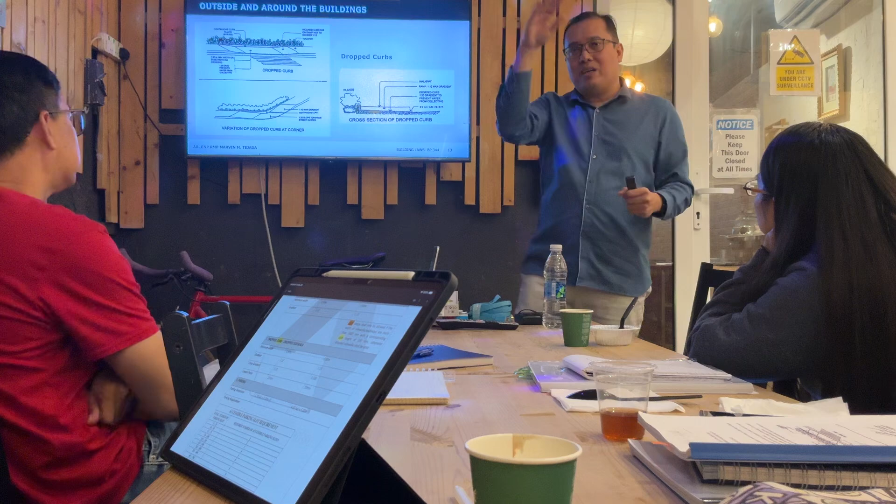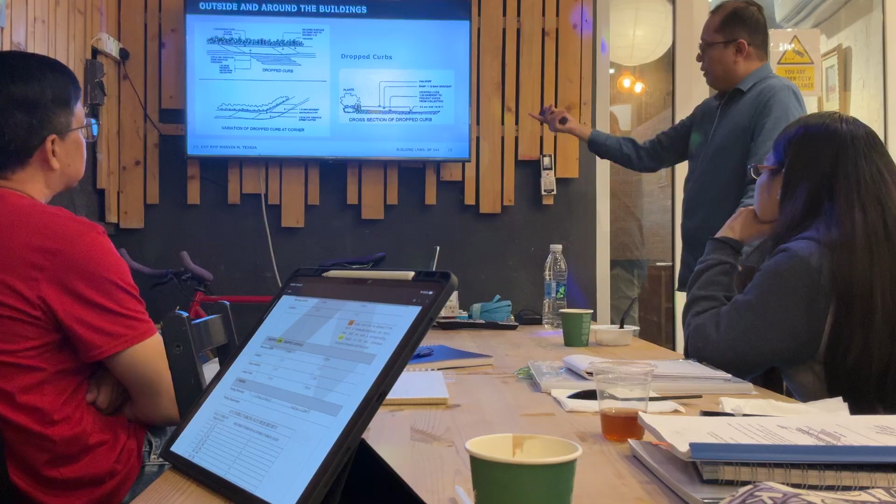So this is the cross-section of the drop curb. So ito yung sinasabi niya kanina, na kung meron mang elevational changes, pinaka-maximum dapat 25.

Okay? Alright. So ito yung mga curb cutouts. Ito yung mga recommended on how it's going to be designed on the street. Okay? So ang purpose natin, the curb cutouts should not be obstructing the walkway or passageway for the wheelchair. So not more than 1:12. Ibig sabihin, pag nag 1:10 yan, 1:8, violation. Okay? Di bali maging 1:15, 1:20, okay? Ibig sabihin, mas smooth. So these are all the variations of the drop curbs at corners na po pwede natin

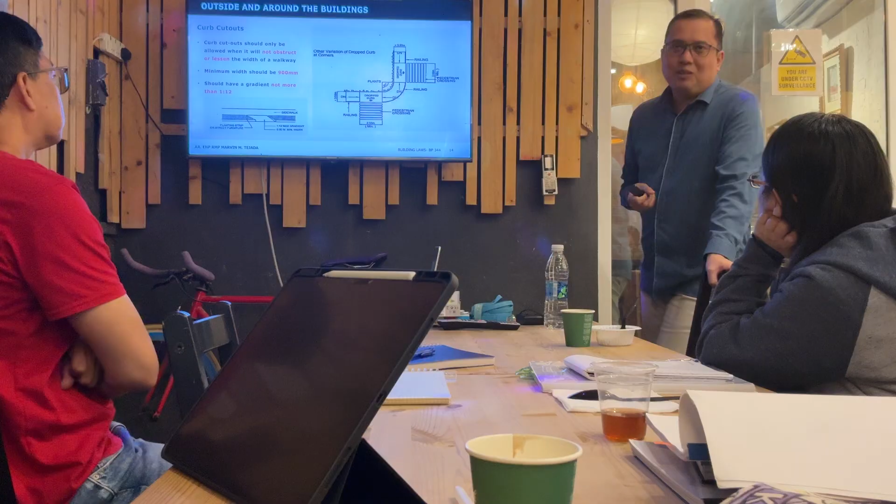Our sidewalks need to be as level as possible. And those materials na ginagamit natin, yung mga nagdo-drawing ng infrastructure dito, they know it. Yung mga unit paving, kailangan yan, kahit na nabasa, ang slip resistance, dapat mga R10 o R11. O saan ko sinasabi yan? Kasi those are the ratings by DIN.

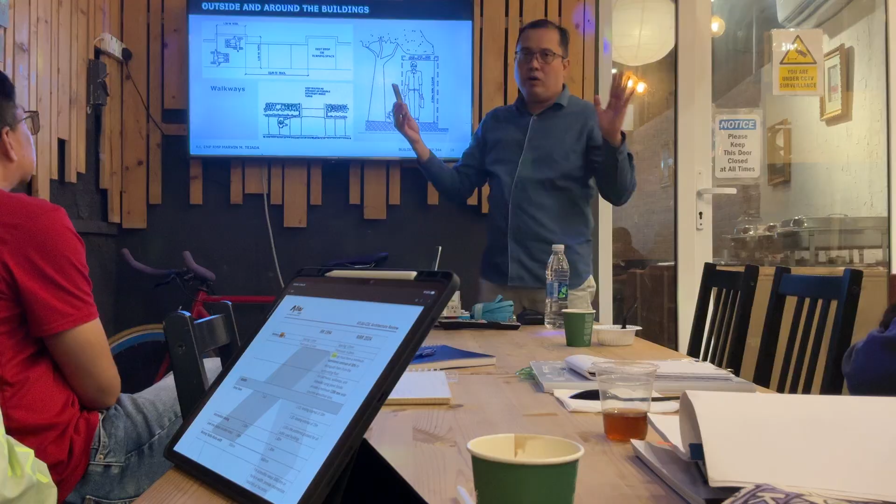So visually you can see it here. That's what I'm saying kanina. Okay? So self-explanatory. So meaning, if I am in a walk space, I have to have a rest stop. And the dimension should be almost like 1.5 by 1.5. So those rest stops in between 12 meters maximum.

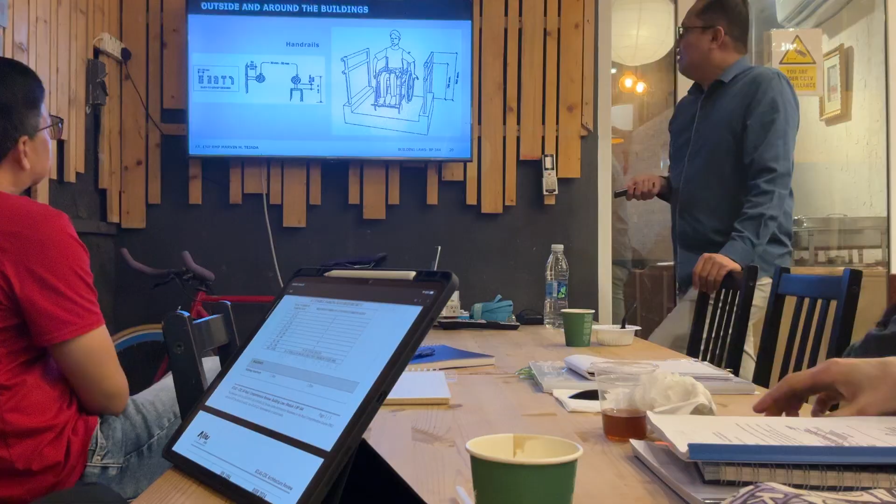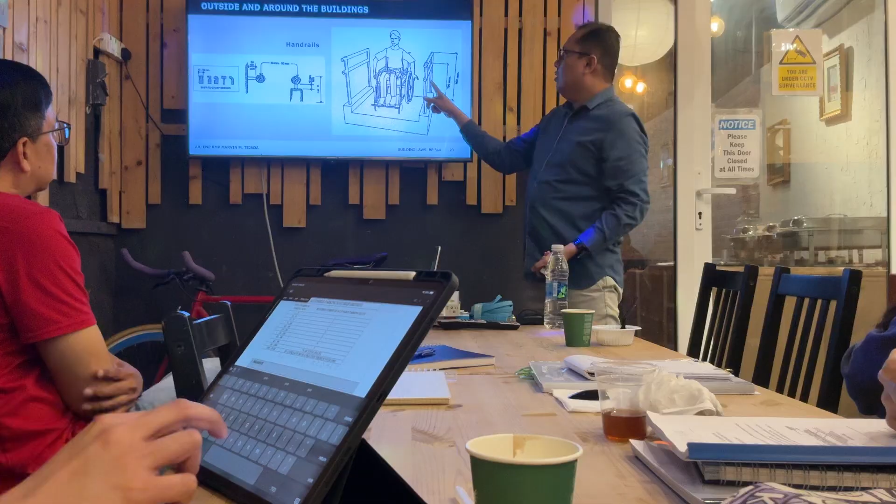So handrail. Okay, so parang mas mabilis kapag visual na tayo. Sige, go. Ayan. So meron kang top rail. From the top rail to the paving surface, or walk surface, 900, 0.9 of a meter. Then kailangan merong intermediate rail. And that intermediate rail needs to be 0.7. So kapag si Architect Armando Eustachio ang mag-inspect ng building nyo, sukatin nyo yan. Then sa kanya kayo papailan ng kaso, violation.

Okay. Alright. So kung ganito naman, naka-concrete tayo, ito naman yung mga required na minimum, maximum. Bakit? Kasi pagka kinuha mo yung handrail, even sa staircase, ito rin yung mga minimum distances. 40 mm, and then the diameter of the actual handrail is from 30 mm to 50. Pag tumaas pa ang diametro niya, hindi mo na yan halos ma-grasp, di ba?

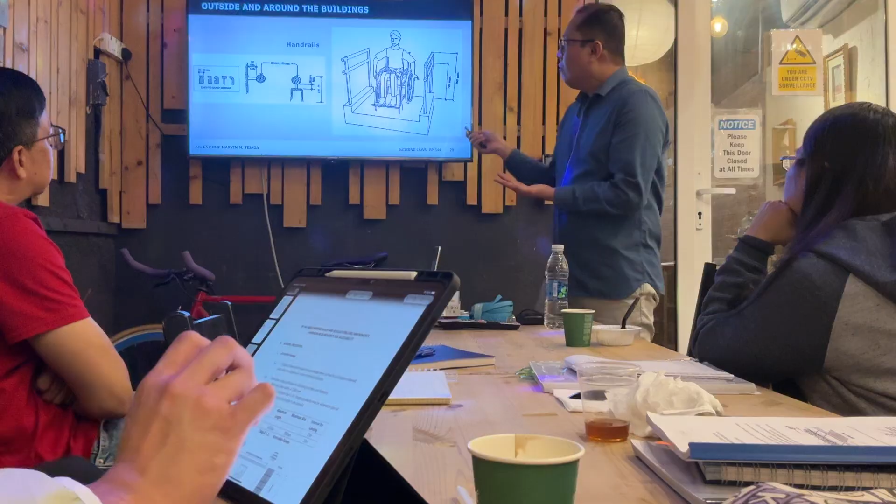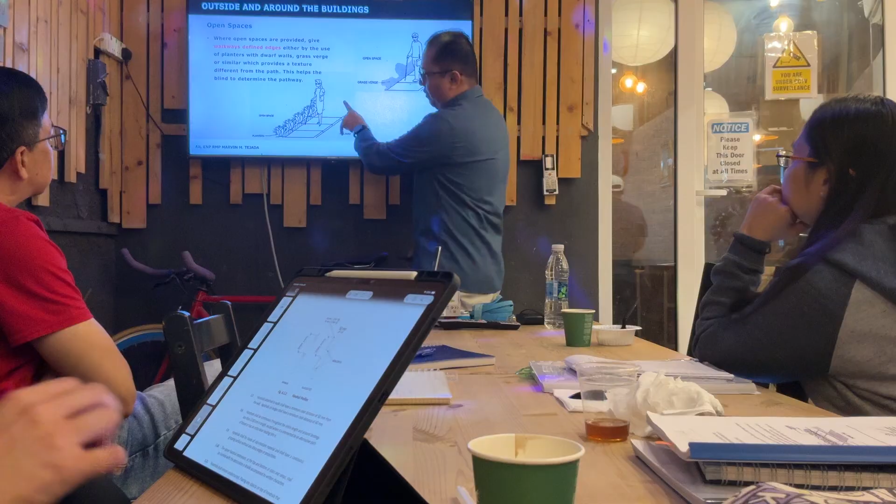So, in open spaces, yun ang sinasabi natin kanina, wala dapat mga overgrowth. Lalo na kapag visually impaired, of course, there must be some kind of rough surfacing para nalalaman nila na there is actually a boundary doon sa walking surface nila. Okay? So it needs to be defined by edges or any material that they can actually feel that there is a boundary to the walking surface.

Meron din standards when it comes sa paglalagay ng signage. So, we need to make sure na kung ako nakaupo sa wheelchair, pagka inangat ko ng konti yung head ko, hindi naman talaga ako dapat nakatingin ng napakataas. The allowable is 30 degrees, na dapat nakikita ko na yung sign kung nakaupo ako sa wheelchair. So, just imagine, kung susukatin ko na nakaupo ako sa wheelchair tapos 30 degrees, I would know kung ilan lang dapat yung taas ng mga signages.

It should be kept simple and easy to understand. When I was working with Doha International Airport, there was submission of those signs para sa mga disabled person. Even yung sign ng toilet, babae, lalaki, even prayer room, chine-check yun. Hindi po pwede masyadong creative doon. Kasi kailangan singular, monolithic ang makikita nilang mga sign para mas lalong makita siya. Kapag masyado kasing maraming design, magulo siyang tingnan.

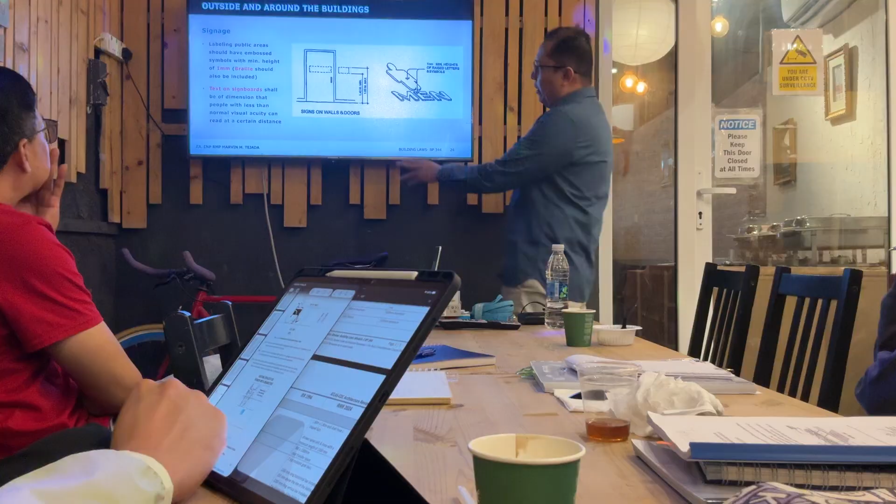Right. Now, in public areas, paano siya ilalagay? So, very clear naman tayo, di ba? Ang minimum niya is from the bottom side of the signage, 1.4. Of course, you have to have the maximum height, 1.6. Okay, so yun yung ano natin.

Then, yung thicknesses, actually natanong ito sa exam. Even yung thickness ng escalator buttons, elevator buttons, natanong din yun. So here, kung gagawa tayo ng mga cutouts for the signages ng mga PWD, 1 mm minimum height. So minimum yun, ibig sabihin pwedeng maging 2 mm, maging 3 mm.

Okay? For the symbols. Now we are going to design the crossings outside and around buildings. So ganito dapat siya. So we have a zebra crossing. Ito nga yung sinasabi ko sa inyo. Napakahirap nito na tawirin ng isang naka-wheelchair. So kailangan lahat ng provisions, ibig sabihin ito, naka-depress talaga siya. As much as possible, level, para maayos yung pagpapatakbo ng wheelchair.

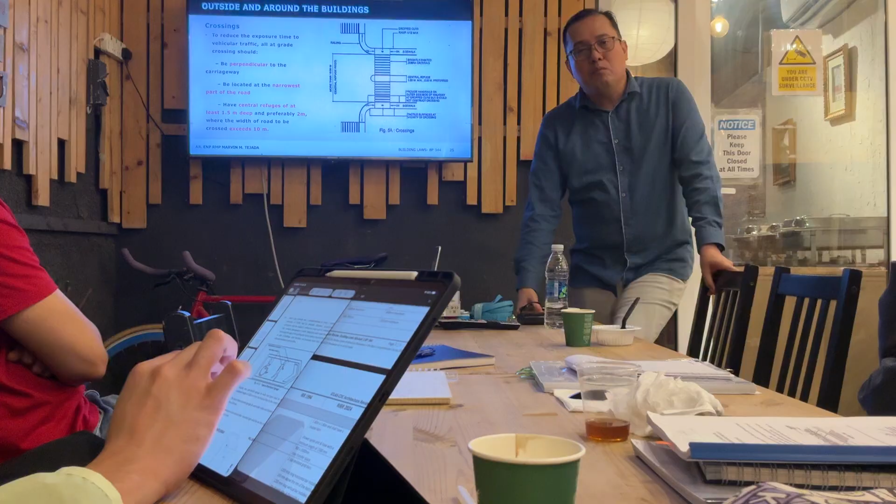So, meron tayong tinatawag na central refuge. Minimum nito should be from here to here, 1.5 deep, or preferably 2 meters, lalo na kung ang width ng road exceeds 10 meters. Okay, ito. Yung hierarchy ng mga road, mga minimum, maximum ng road, collector road, main road, major road, nakadepende rin ang BP 344 doon. So, konektado yun doon.

Hindi tayo mahilig gumamit ng tactile. Pero dito sa bansang ito, sa Qatar, even sa loob ng airport, you can actually see metal tactile. Bakit kailangan ng tactile? It is actually required for those visually impaired, lalo na pag may hawak na na cane.

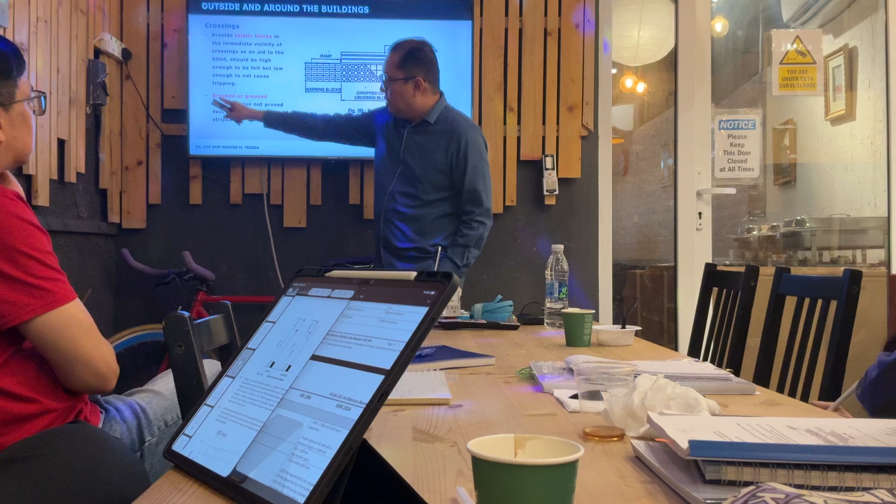So, tactile blocks, okay? And the concrete needs to be having this finishes, brush or groove, okay? Para mas applicable para sa mga PWD. Of course, visually you can see here crossing. You can actually use all of this.

Okay. But alam niyo ba, mayroong science behind why yung traffic light is having those kind of lights na luminescent red, luminescent green. Because may mga tao kasi na colorblind. Do you believe that? Okay. Na minsan akala natin sa normal na tao, green yung atin, pero sa kanila gray.

May mga ganon. Actually, I attended one webinar. Even yung webinar namin, talagang naka-design siya para sa mga color-blind people. Okay? So, ayun. Even the letters, font style, do you know the meaning of font? F-O-N-T? Meaning yung lettering na style. Meron din certain na ginagamit na mga font style.

Okay? So, you can actually see them in public space. Hindi lang sila palamuti doon, but actually is essential. Okay? So, kung gusto natin maging livable ang city natin, if we want to become a place that is adaptable to any people, kailangan natin ito. Okay? Alright. So, alin ba ang kailangan natin maintindihan?

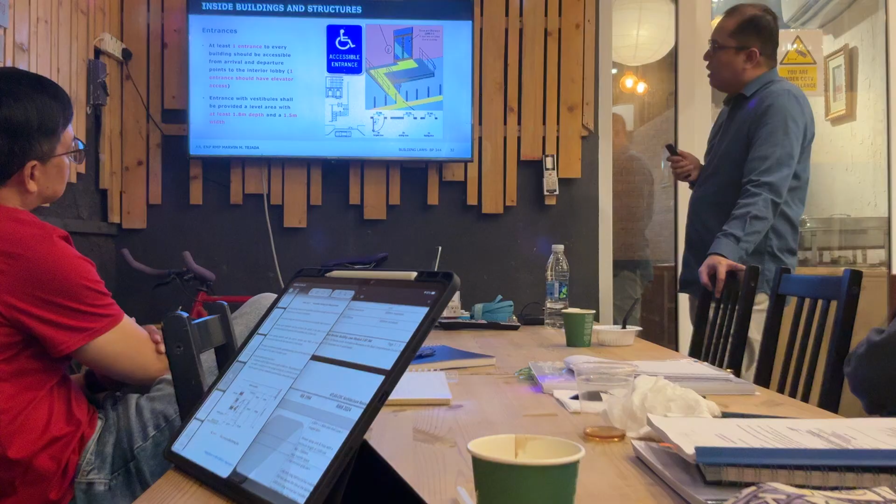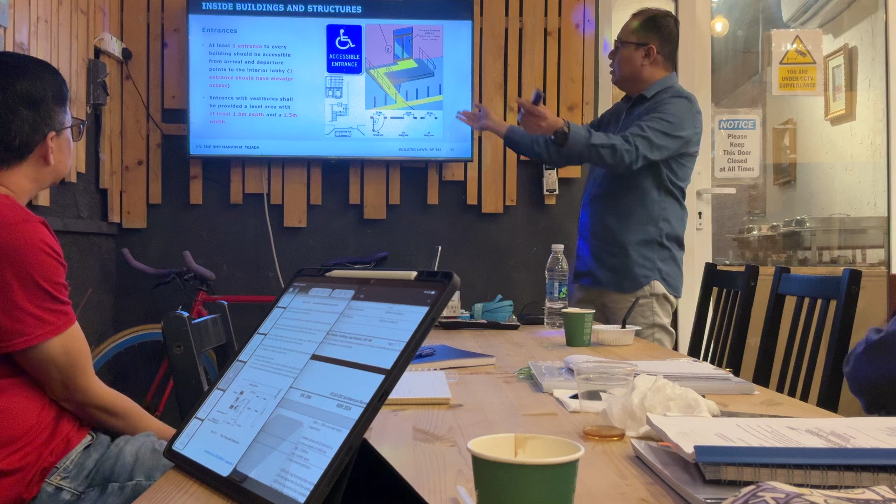Alright, so that's parking. Now we go to inside buildings and structures. Okay, so mas madami tayong pag-uusapan inside buildings and structures. So always there is a prominent sign. Okay, and then we have doors and doorways. Lalo na swing in or swing out. Should be swing in.

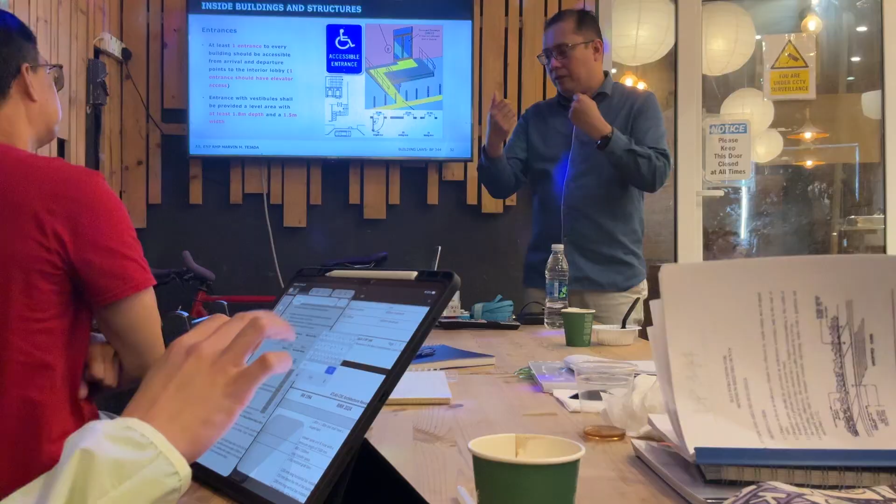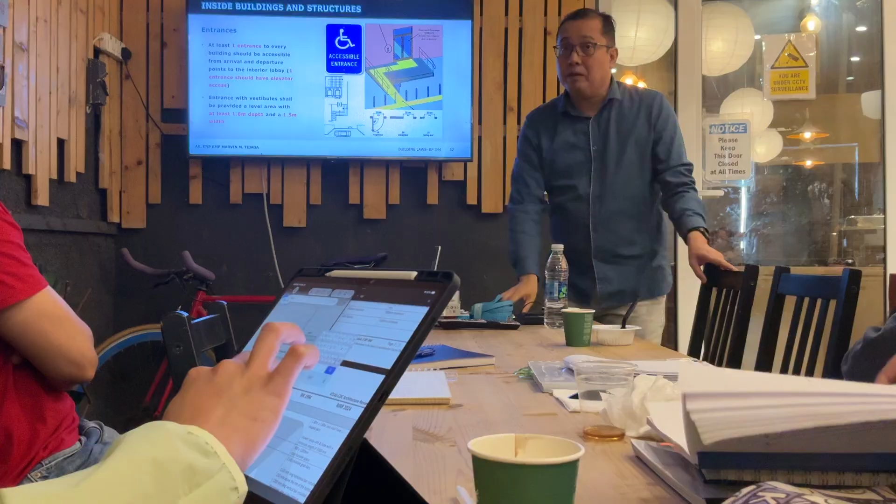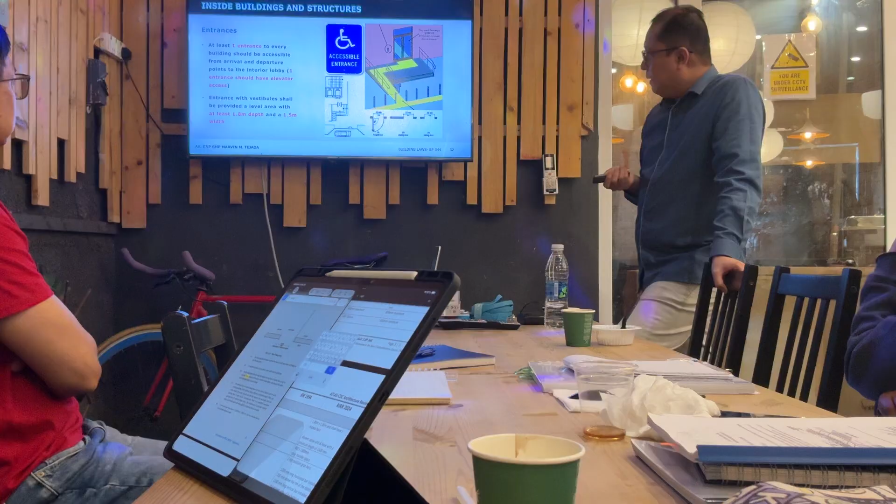Ganun yun dapat. Okay. So, at least one entrance to every building should be accessible. And then should have elevator access. Then, entrance with vestibule, ito yun. Okay. Should be having an area of 1.8 by 1.5 width. Okay. So, ayan ha. Alright.

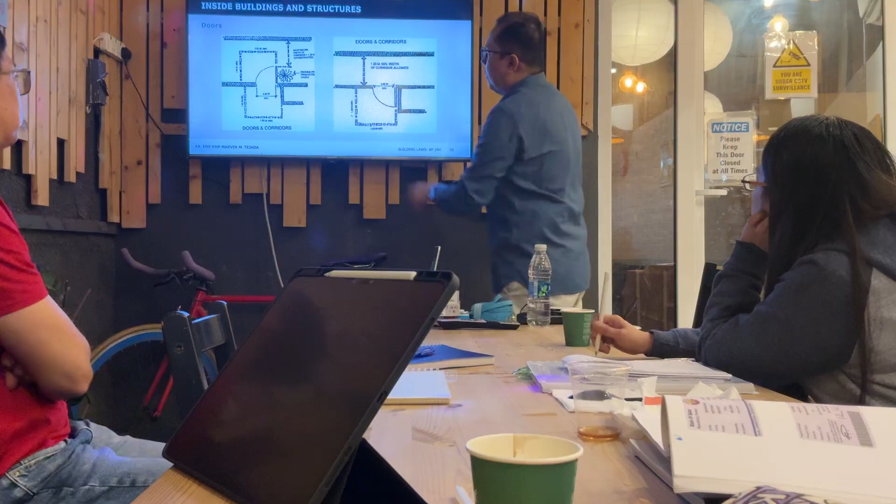So outswinging doors should be provided at storage room. Hindi po pwedeng paloob, lalo na sa closets and PWD toilet stall. Latching or non-latching hardware. Hoping na itong mga ganito, mga terminologies, ma-explain sa inyo kapag building construction na at pag-aaral na kayo na door hardware.

Doorknobs, ang location ng mga ganito para sa PWD, dapat between 0.82 to 1.06, mga full handles 1.06. And then may mga kick plate na 300 to 400. This is the kick plate. Okay, and then mounting ng mga hardware, either by latching or pull, and then threshold.

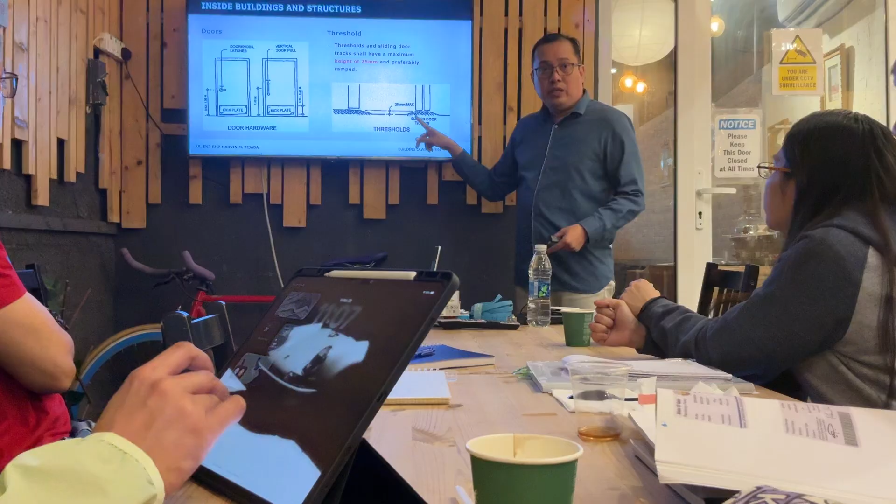25 millimeter max. Pwedeng bumaba, pwedeng 20 mm, pwedeng 13, huwag lalagpas sa 25. So ayun, tapos kung mapapansin ninyo, hindi po pwedeng ganito kaagad, square. Dapat may ano muna, tawag dito may chamfer. Tama ba? Chamfer.

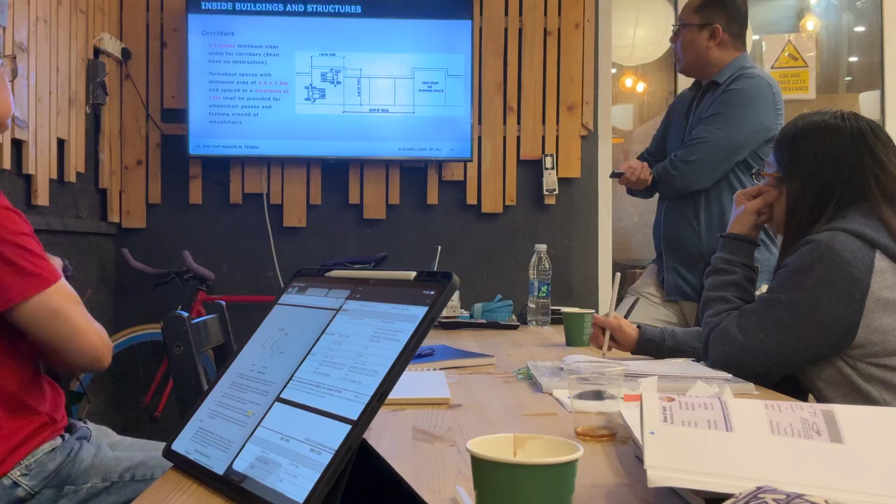Corridor, laging may rest stop, up to 12 meter max, then rest stop is measured 1.5 by 1.5. Kung may dead end, provide kayo ng turnabout spaces within 3.5 of every dead end. For example, here, 3.5 dead end. So still you need to have this 1.5 by 1.5 rest stop para sa inyong mga wheelchair users.

Importante na kapag ang mga passageway na dinidesign ninyo, always anti-slip or slip resistant. So interior, ang advice ko sa inyo, through DIN standard, laging R9. Then external is R10, R11. Pag tumingin kayo ng katalogo ng mga tiles, anything, stone surfaces, basta lahat, lagi nyo mahanapin yung slip resistance rating. So washroom and toilets, ito yung lumang batas, 1.7 by 1.8.

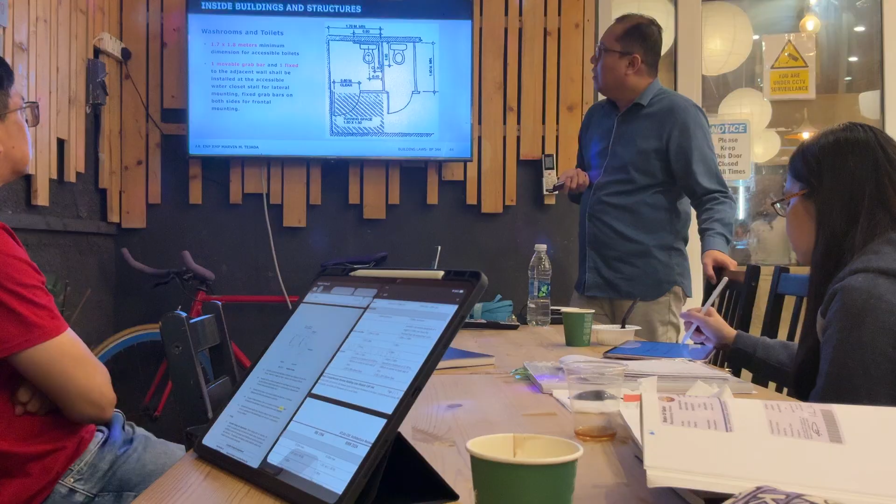Ngayon nagbago na yan. And then you have this, kailangan may grab bar. Meron tayong grab bar na dito, operable, hindi siya fixed. So importante na ilagay niyo sarili niyo sa ano.

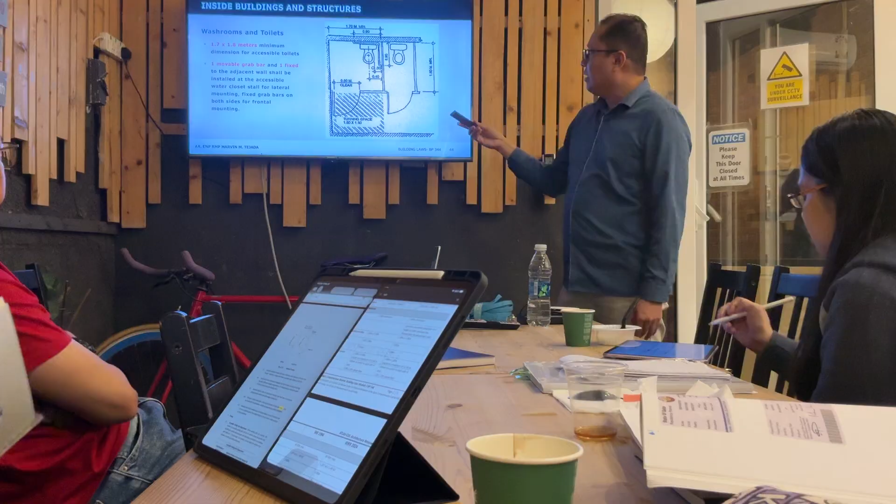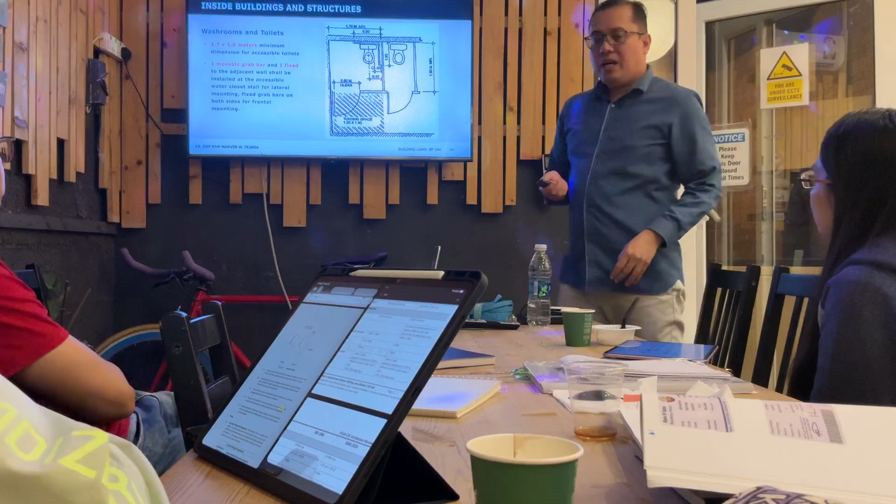Bye-bye. So ito yung layout natin, di ba? Minsan yung grab bar dito, meron pa dito, ang tawag dito yung operable. Nakakita ako ng disabled toilet, even yung pag maliligo sila, meron tayong tinatawag na parang may upuan din sila doon sa shower area. So napaka-importante naman ngayon.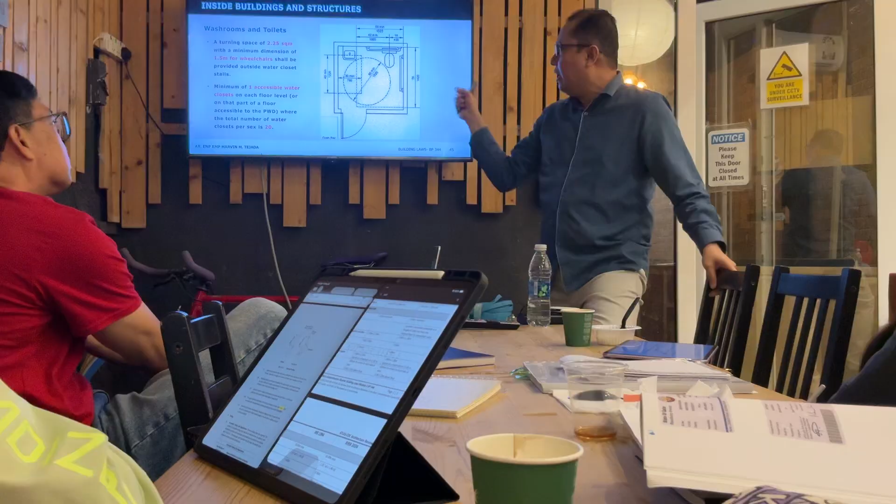So pagka may mga nagpe-pre-qualify sa akin na buong system ng disabled toilet, isang package yan, dapat bigyan niya ako ng hindi patingi-tingi ang ginagawa ko, isang supplier ang magpo-provide sa kanila. So ito na ang sinasabi ko sa inyo, ito ang pinaka-ideal. Walang tatamaan na any fixture. Madalas, itong linya na to, minsan tumatama doon. Minsan inaalaw ng batas yan sa luma, pero this time hindi, so dapat wala siyang tatamaan.

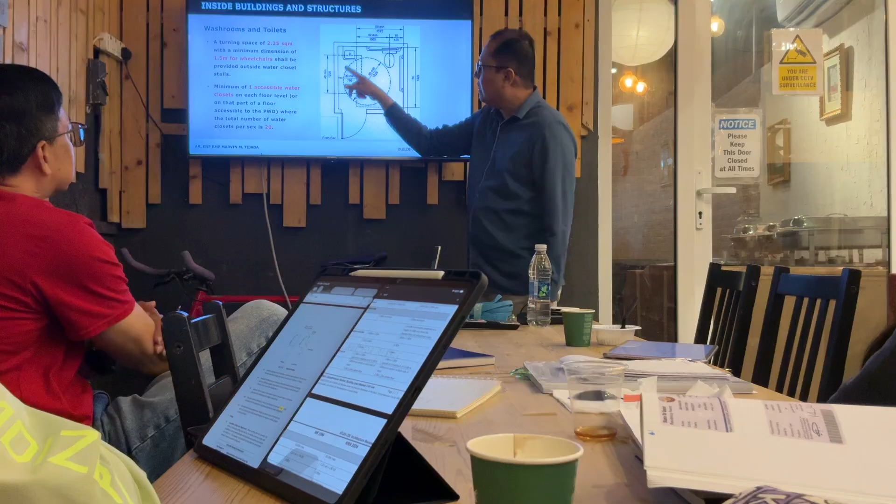So the turning space, 1.5 by 1.5 for wheelchair, but kung susumahin mo, minimum niya is 2.25 square meters. Accessible water closet, yung mounting height and even yung level ng pag-uupuan, even yung lavatory, iba ang dimension from the floor kasi sila nakaupo, di ba, so mas mababa sila. And even yung pag-upo nila, hindi naman yung katulad ng regular, so mas mababa rin sila. Alright, so as you can see, minimum, tingnan nyo yung grab bar, so marami silang hawakan.

Para kapag lumipat sila, kaya nilang ilipat ang sarili nila from the wheelchair up to the area. Always remember na lahat ng mga people with physical challenges, sa totoo lang, ayaw nila nang tinutulungan sila. Gusto nila, gagawin nila yung dapat nilang gawin without assistance. Kaya dapat ang mga design natin talagang meron silang self-sufficiency.

Alright, so sabi, kapag sa isang public toilet, meron kang 20 numbers of water closet, ang ratio nun, isa, mag-provide ka para sa disabled.

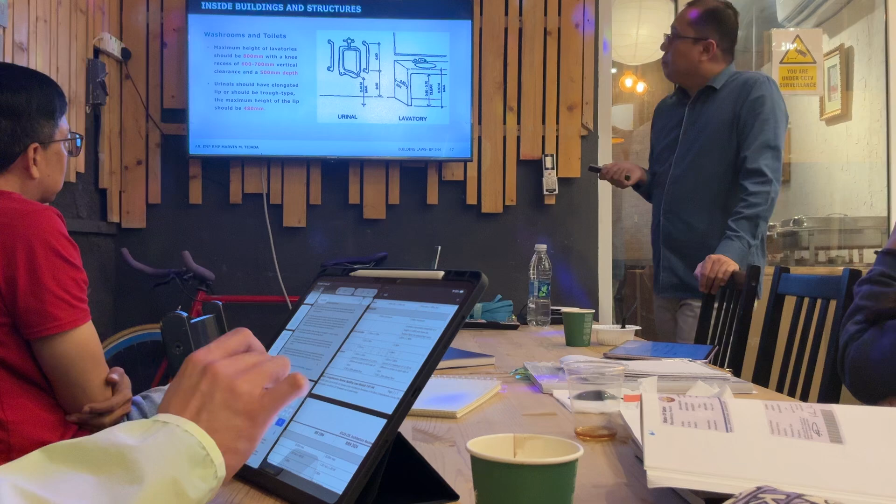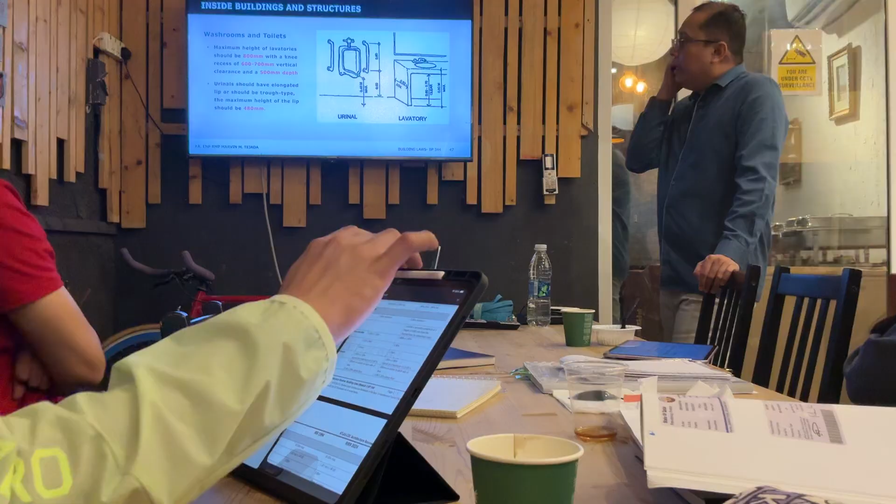Kung urinal, yan din yung kailangan natin. Merong grab bars, yan yung dimensioning, 0.48 m max. At kung mayroon kang counter, 0.8 naman dito. Importante ito, yung clear sa ilalim ng counter kasi baka tumama sa tuhod nila. Minimum naman ito.

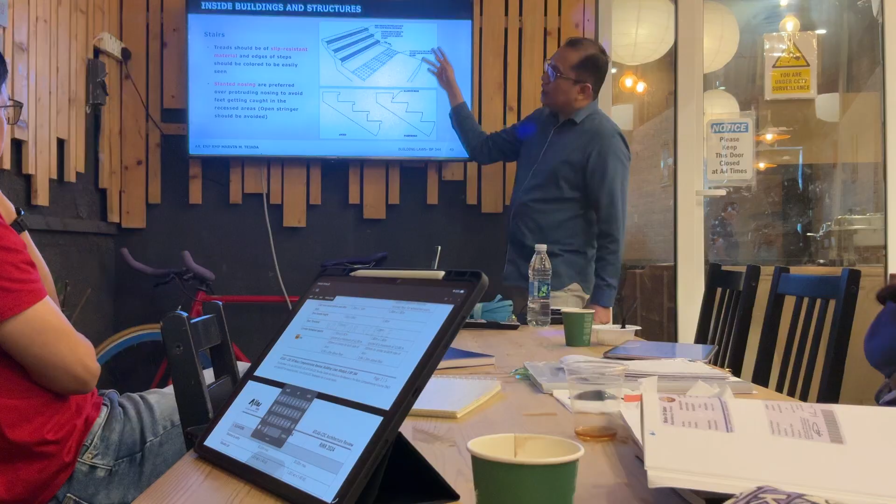Sabi natin slip resistance. So even the staircase, minsan kasi may mga nakatungkod, hindi na talaga sila dumadaan sa rampa, diretso na. Kung ilan lang naman ang step, pero tayo sa nosing, either rubber o kaya metal.

Pag nagde-design tayo ng staircase, always remember to have this. Slanted nosing are preferred rather than protruding nosing, to avoid yung feet getting caught in recessed areas. Hindi rin po pwede yung open stringer, baka lumusot yung tungkod.

So may tactile, 300 mm, actually standard to. Pag bumili kayo sa market, bibigyan na lang kayo ng 300 mm.

Elevators, yan na nga. Accessible elevators mula sa entry, kung may PWD dapat hindi lalayo na 30 meters. And then ang minimum dimension ng elevator para sa PWD, 1.4 by 1.4, 1.1 by 1.4 meters. Minimum yan, pero I don't think na may nagde-design ng ganyang ka-minimum ngayon. So meron talagang mas maluwag pa, kasi hindi lang naman isang sasakay sa elevator, madami.

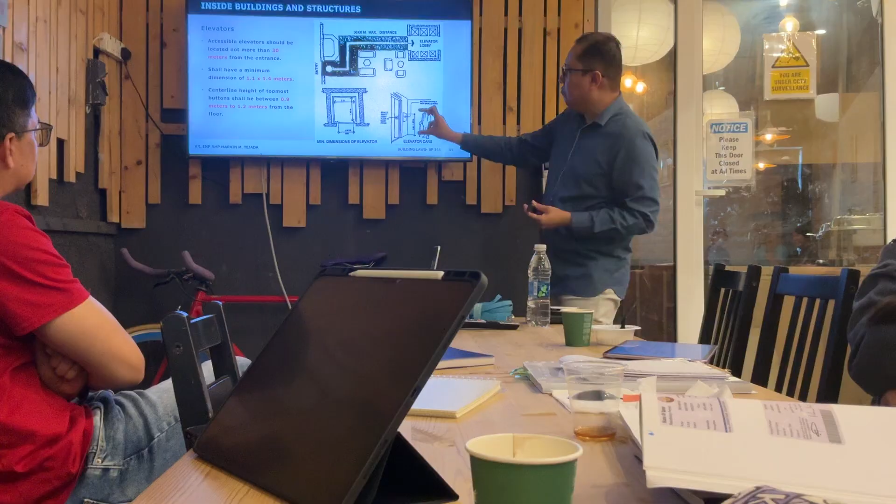At yung any control operational panel o COP, kailangan talagang medyo mas within that 0.9 to 1.2, hindi masyadong mataas, hindi masyadong mababa. Ito lumabas sa exam.

This one, ilang maximum depression ang need para doon sa button, as per BP 344. Bibigyan kayo ng mga values, pero ito yun: 1 mm minimum, 1 mm max. Button sizes shall have minimum diameter of 20 mm and maximum depression depth of 1 mm. So hindi po pwedeng 1.5, hindi rin pwedeng 2 mm kung para sa PWD, even kung nasa loob na sila.

Water fountain: so there will be at least one water fountain at every 2,000 square meter of floor area in every space. Then ang maximum height niya is 850 mm. And foot pedal, mas maganda kung foot pedal kasi kaya nilang abutin ng kanilang paa. Pwede rin push button controls kahit dun sa gilid. Kailangan nyong sundin to kasi para pagka-parang nagkaroon ng supply ng water, hindi tatama sa mga...

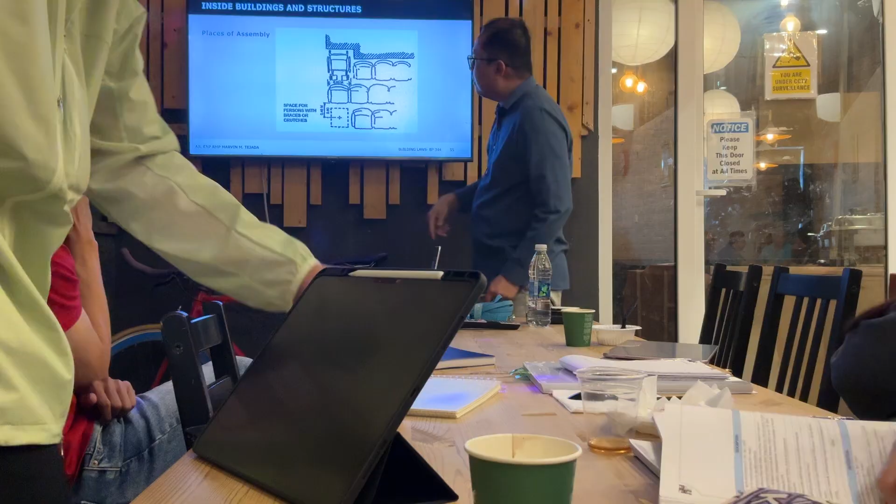We know this already: in any public spaces, places of assembly, laging merong slot para sa mga PWD. Minsan nga sa sinihan, nakakita ako, side by side, dalawa dito sa isang side, dalawa dito. And then spaces for persons with braces and crutches, meron na yan sa kanila. So at least from the extent point of the seat up to the center point of the other seat, minimum maximum 0.8.

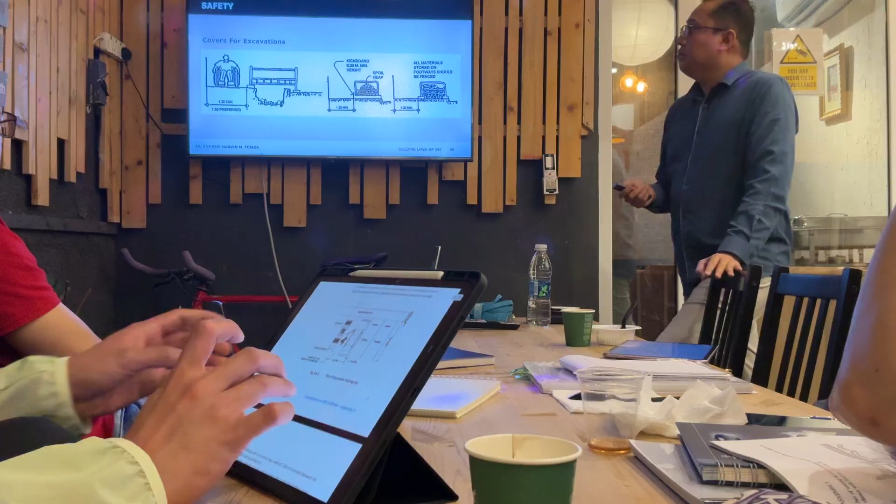Safety: in any areas kung mayroong public works, this is self-explanatory, always have to have a barrier. Meron kang tinatawag na kickboard para doon sa may mga tungkod, na malalaman nila na merong safety barriers. And of course, alam na natin to, na any excavation needs to be covered with temporary covering. So those are the requirements para to protect the public, most especially the public including PWDs.

Signages, okay, so on and so forth. Visible alarm system is required. They refer tayo kay RA 9514 Fire Code of the Philippines, and also referring to PD 1096 National Building Code of the Philippines. Doon natin yan titingnan. Alright, so that's it for BP 344. Those are the essential points.